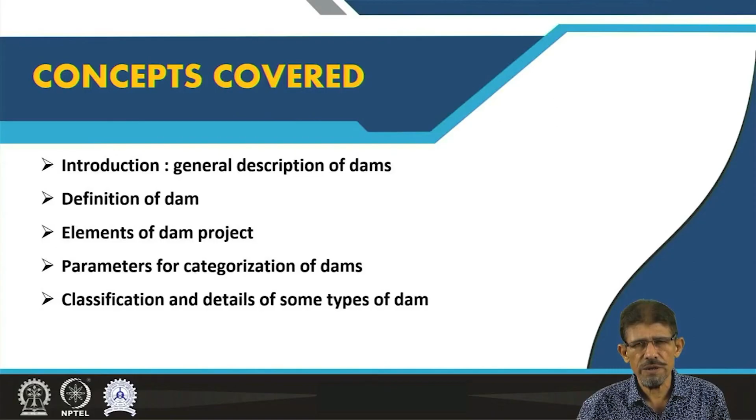Now we are competent enough to understand various aspects of engineering structures in the realm of engineering geology. Therefore, in these lectures, we will initially discuss some preliminary aspects and detailed aspects. Today, we are going to discuss dams and their types. In these lectures, we are going to elaborate on the concept and classification of dams. For this, we are going to cover the general description of dams, definition of dam, elements of dam project, parameters for categorization of dams, and classification, details of some types of dams.

Friends, as you know, dams are the barrier to check the flow of material. The dam projects are important for any country due to their significant contribution to the economy, prosperity and progress of any nation. Harnessing water resources of the country is the main aim of constructing a dam. Therefore, dam projects became popular throughout the world for various purposes like irrigation, water supply, fisheries, etc. Therefore, dam projects are very important for any country throughout the world.

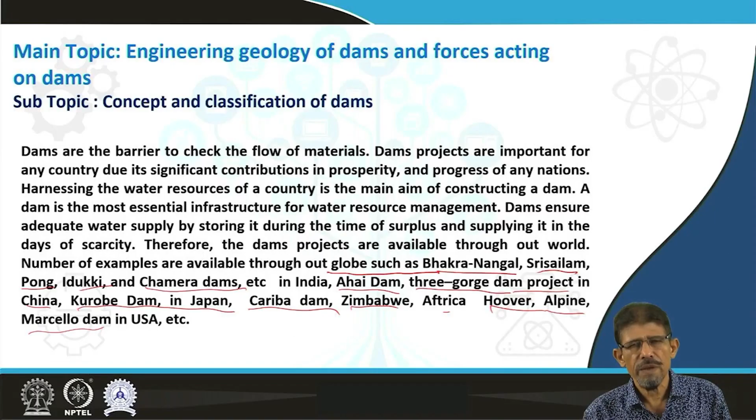A number of countries, or almost every country, has developed some dam project for generation of electricity or providing water to the communities, etc. For example, we have a number of examples throughout the globe, such as Bhakra Nangal Dam, Srisailam, Pong, Idukki and Chamera Dam in India, famous dams, Three Gorges Dam project in China, Kurobe Dam in Japan, Carib Dam in Zimbabwe, Africa, Hoover Dam in USA, some of the famous dam projects. Besides these, a number of dam projects are available in every country of the world. India is also rich in dam projects.

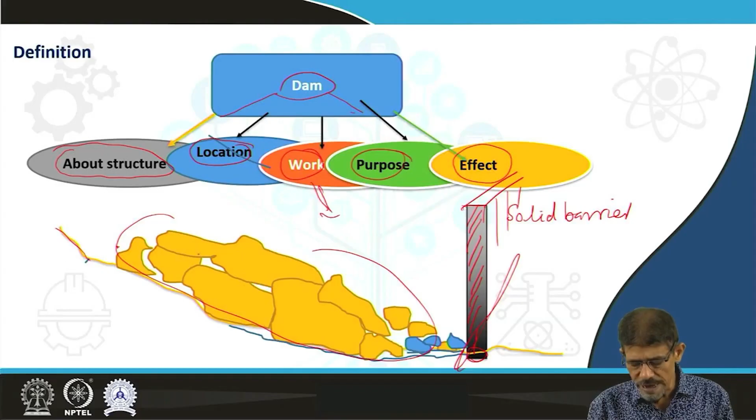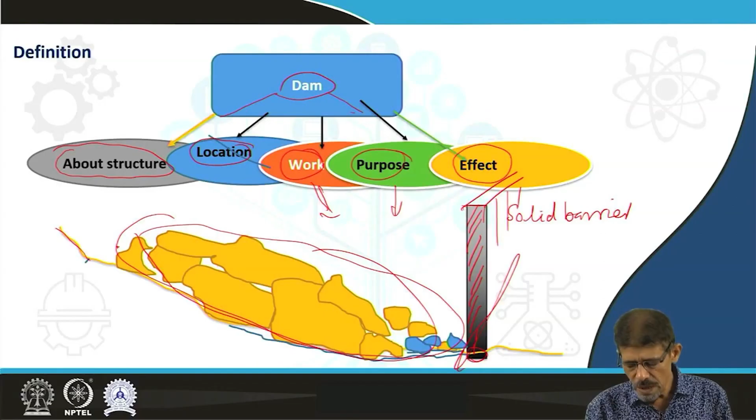If we are going to see a dam in general, we can explain the dam in view of nature or feature of structure, then location, then work, then purpose and then effect. In generalized form, this is a solid barrier. This cartoon portion represents the structure, a solid barrier. Solid barrier located at a particular location across this material; in 3D you can extend it in this way, across this material. What is the work? To check the flow of material. And what is the purpose? For impoundment of such materials. What is the effect? To change the physical, geomorphological, geological, hydrological and topographical features of the area.

Here why are we utilizing this material? As per generalized definition, we can say that a dam is a solid barrier constructed or developed or located across a flowing material to check the flow of material for impoundment of material or for storage of material. Due to this, there is a change in geological, geomorphological, hydrological and topographical features of the area.

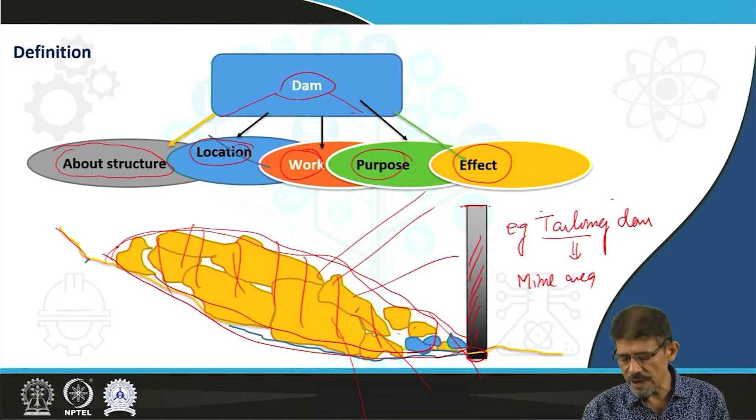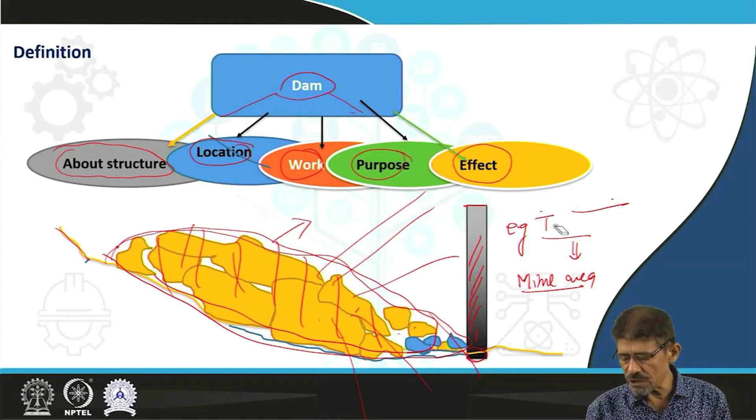For example, tailing dam from a mine area or industrial area: we are going to put waste material released from mines and try to store the waste material, avoiding unscientific distribution of material that would damage a large area. Then also we construct this type of barrier. This type of barrier is also known as a dam. The dam impounds or stores this and does not allow further distribution of the material liberated from these mines or industry or any domestic waste, etc. So in general, the dam is a solid barrier constructed across, to store material by checking the flow of material. So in a very simple way, you can explain the definition of dam in a generalized, easy way.

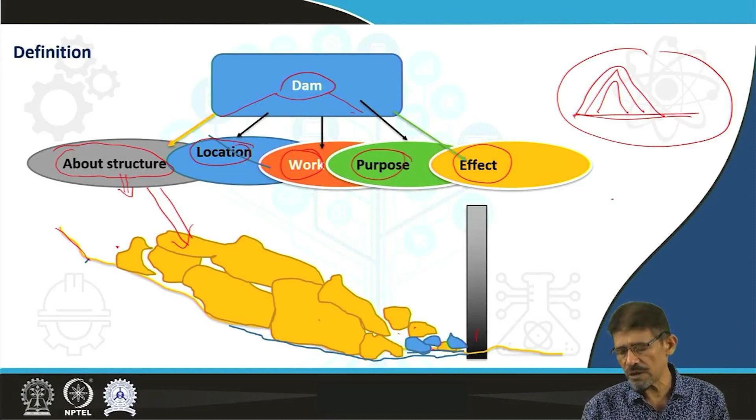First we are going to concentrate on this point about structure. So a dam is a solid barrier located across a flowing material or material under dynamic state. For what? To check the flow of material, and as a result, to store the material properly. And if a ground has stored material, then there is a change in geomorphological and geological aspects, because this stored material affects many components of earth, many processes involved in modification, some leaching, some distribution, and some development inside this stored material, etc. So there is a change in geomorphological, geological, hydrological and topographical features of the area.

The same concept we are going to utilize for water. If we treat this as water, then the same thing: a solid barrier constructed across flowing water to check the flow of water for impoundment of water, and a change in the hydrological regime of the area. If we look at this dam, then we can say that the dam may be made by a natural agency or may be man-made, anthropogenic.

Therefore, in the next step of generalization, we cannot say the dam is made by man, or the dam is created by man only. In nature also, in a number of places you can see the formation of dams, particularly in hilly regions, in the Sikkim area. The Sikkim area is prone to such temporary dam formation during the rainy season. Time to time, some blocks of rock block the flow of water temporarily, which may be dangerous for the low gradient, low lying area toward the downstream side.

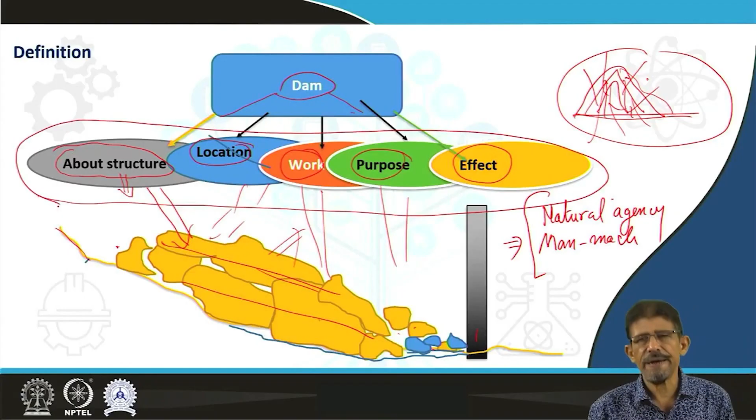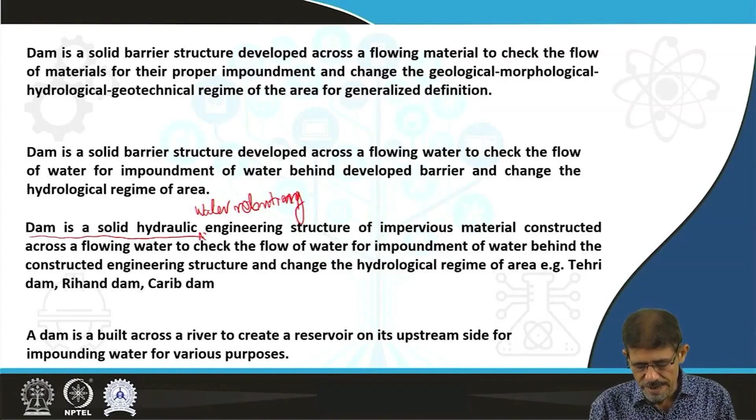So a dam, here we are going to define: a dam is a solid hydraulic water retaining, it is good to use retaining, engineering structure of impervious material constructed or developed across flowing water to check the flow of water for impoundment of water behind the constructed structure. And as a result, what happens? It changes the hydrological regime of the area. For example, Tehri Dam, Rihand Dam, Carib Dam and many dams throughout the world.

In the case of Tehri Dam, earlier the area of Tehri had some fort and some varieties of tall buildings, lots of vegetation and others, but after construction of the Tehri Dam, the major area was submerged underwater and new features came. It means there is a change in the hydrological regime of the area.

The water realm changes after construction of a dam because the dam creates a huge lake behind the structure. Suppose this is the dam, so this is a great lake or huge lake behind this structure as a result of impoundment of water. So now I will again try to explain this definition for easy understanding.

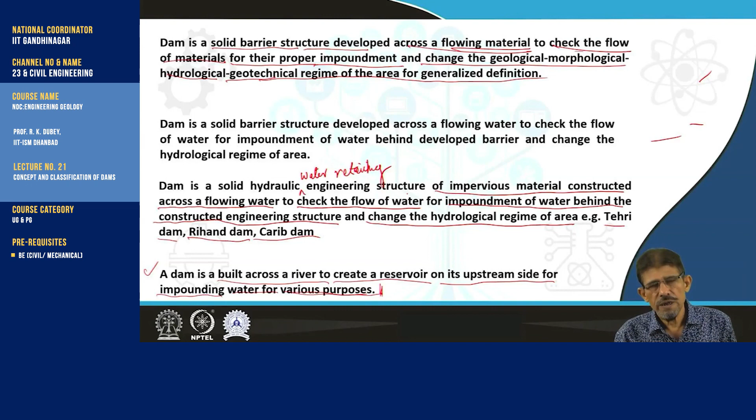Then if we consider the material as water, a dam is a solid barrier structure developed across flowing water to check the flow of water for impoundment of water behind the developed barrier and change the hydrological regime of the area with respect to the water realm or water catchment area. In engineering structures, it is a very excellent example.

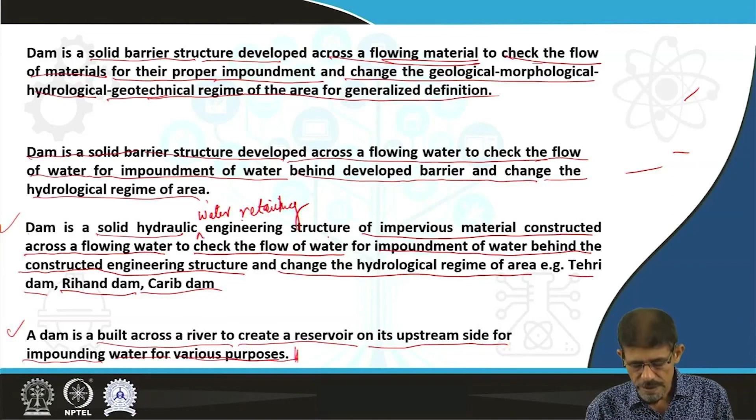A dam is a solid hydraulic water retaining engineering structure, particularly of impervious material, across flowing water to check the flow of water for impoundment of water behind the constructed structure and change the hydrological regime of the area. In very limited words, we can say that it is a barrier used to store water.

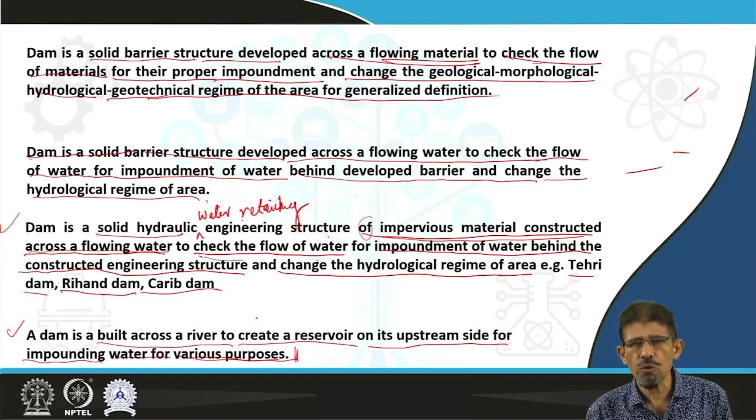Next, we are going to discuss the elements of a dam. Here I have developed this concept in view of this cartoon. You can see this is the section of a dam. A dam is actually like this, in 3D. Here we are going to check this section. This section is like this. This structure is solid in nature as per the definition, checking the flow of water from this zone, resulting in impoundment of water.

Here you can see earlier, here may be a river of limited width and extension, limited features. Now we are having here a huge lake. If we are going to see this whole structure, we can recognize it as a dam structure. The water stored behind in the form of a large lake we can recognize as a reservoir.

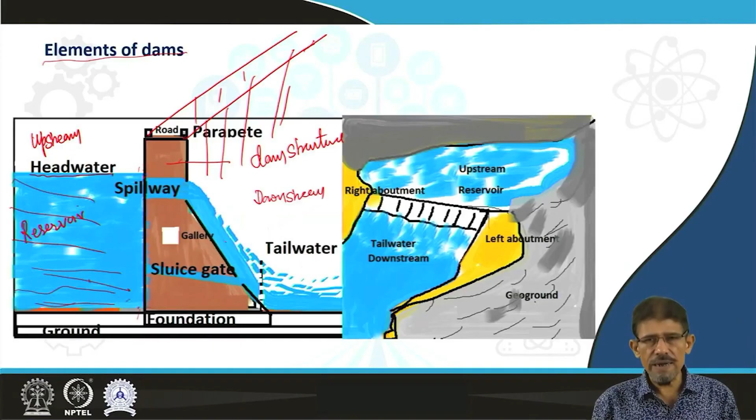The reservoir is located in the direction which we are going to recognize as upstream, and the water stored in the upstream area we are going to recognize as the headwater region. Opposite to this, the downside of this dam is known as downstream, and the water stored in this zone is recognized as tailwater. The tailwater accumulates due to release of water through the spillway or some openings. The water present in this zone is recognized as tailwater.

The top portion of this structure is known as the crest, and the bottom portion of this structure is known as the foundation or base. These two horn type solid structures, these walls, are recognized as parapet. This parapet is going to facilitate safety for the movement of vehicles on the top of the crest, and for pedestrian movement of people and others, and it also improves the ornamental look of the dam.

The distance from the surface of the water up to the crest is known as freeboard. The part of the dam at the bottom side which makes contact with the headwater is recognized as heel, and opposite to this, the contact on the downstream side with respect to the foundation strata is recognized as toe. The opening for release of water from the reservoir side is recognized as spillway.

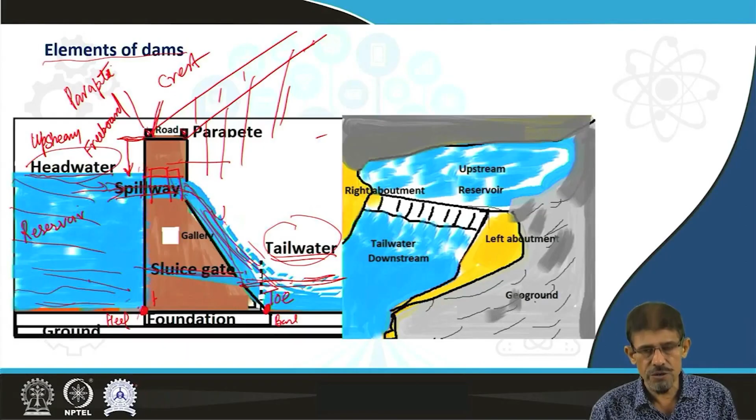Here we have some gates, recognized as spillway, and the spillway allows the water from the upstream side to the downstream side, or from the headwater region to the tailwater region. So here the water present in tailwater is due to release through the spillway, or we have another type, a narrow opening close to the bottom of this dam, recognized as sluice gate. The sluice gate also provides some water to the tailwater region from time to time.

Beside this we have one long narrow opening here. This long narrow opening is recognized as gallery, and this gallery is utilized for multiple purposes: for movement of officers and technical persons, for grouting, for installation of instruments, for checking the normal function of the dam, etc. In addition, this gallery is also important to reduce the upthrust, or upward acting force due to seepage of water near the foundation, which we will discuss in future; this is one of the principal uses of the gallery.

Below this foundation we have ground, maybe soft ground, hard ground, crystalline ground, bedded ground, foliated ground and others. Beside this, if we see the lateral extension, here I have shown you this earlier. So now you can concentrate on this aspect. This is the dam structure. This is the upstream side, and this water body is due to release of water from the spillway.

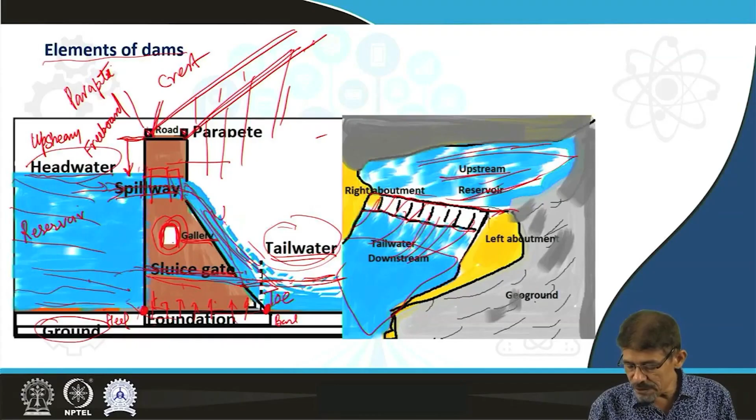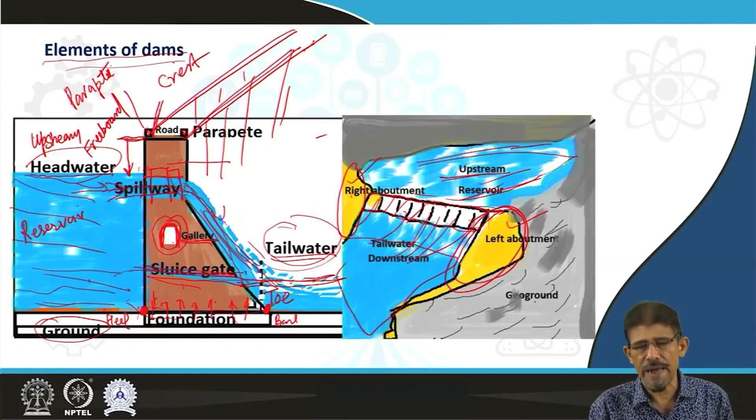The left side of this dam is recognized as left abutment, and the right side of this dam is recognized as right abutment. The left and right abutments protect the dam structure from different stability points of view. In this way, we analyze the major elements of a dam. For theory, you can see them one by one.

The reservoir: formation of an artificial lake on the upstream side of the dam due to blocking of the flow of river water is called a reservoir. Second, abutment, located as left abutment and right abutment. The parts of the two sides of the valley of a dam are called abutments. Abutments provide protection against the slide of soil or of weathered or weak material or rock. Crest is the top part of the dam.

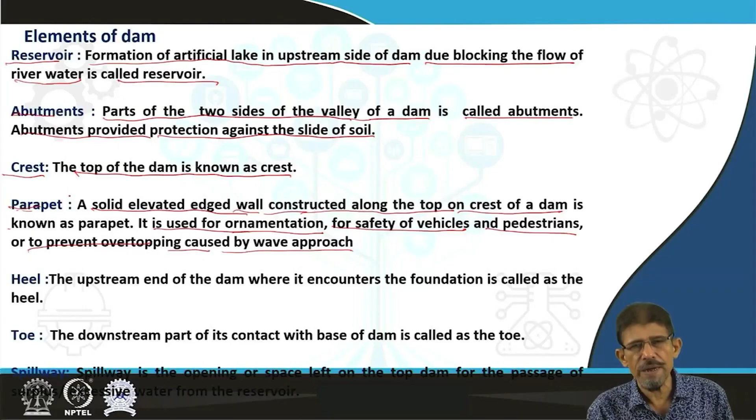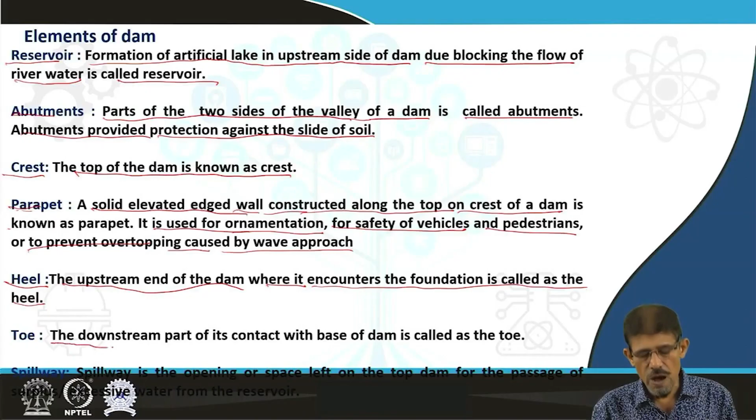Parapet is a solid elevated edge wall constructed along the top and crest of the dam. It is used for ornamentation, for safety of vehicles and pedestrians, and to prevent overtopping caused by wave approach. So the parapet is also a very important element of a dam. In addition, heel: the upstream end of the dam where it encounters the foundation is called the heel. Opposite to this, the downstream part of contact with the base is called the toe.

Next terminology, headwater: the high reach of the water flow at the upstream side, particularly in a reservoir, is recognized as headwater. Opposite to this, the accumulation of water toward the downstream after the dam is recognized as tailwater. Freeboard is the distance between the maximum level of water present in the upstream side or headwater region and the crest.

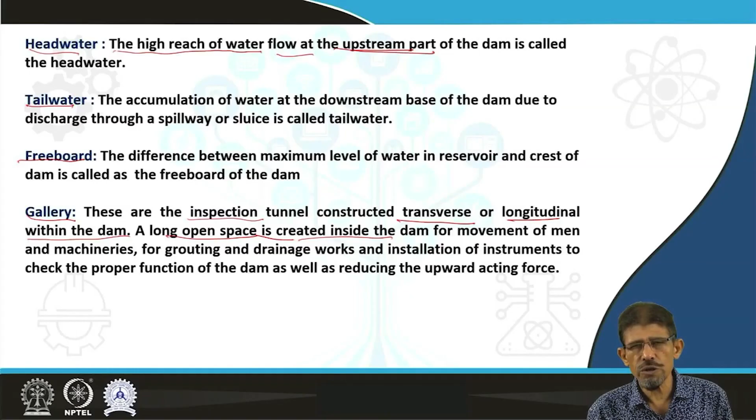The gallery: these are the inspection galleries, transverse or longitudinal within the dam. This long open space is created inside the dam for proper inspection, for grouting, for repair, for maintenance, and for reducing the upward acting force. So these we have already discussed. The elements of a dam describe different parts of the dam project.

Now it is important to classify different types of dams. As per definition, it is utilized for multi-purpose or for mono-purpose. Various purposes we have already briefly explained. If we are going to categorize dams, then it is easy to utilize certain parameters for classification, like intended purpose, material used, design and function, then application. In view of these parameters, we are going to categorize different types of dam.

First, we are going to elaborate about intended purpose. Intended purpose is mainly based on objective: for what objective was the dam project constructed, or will the project be constructed in future? Irrigation dam, hydropower dam, water supply dam, flood control dam, navigation dam, fishery and recreation dam, wildlife water supply dam, etc.

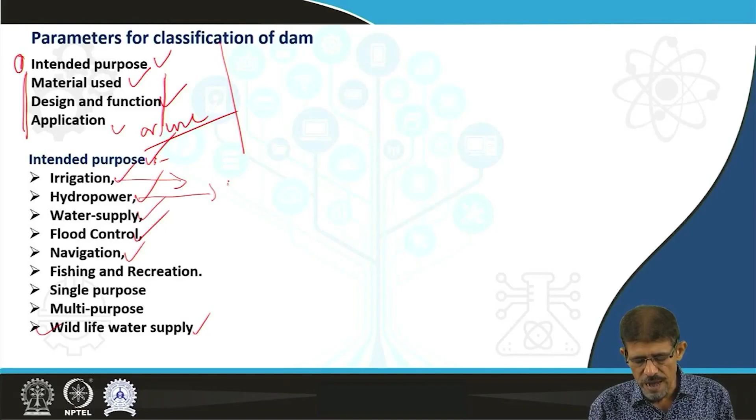The name is self-explanatory. If the dam project is utilized for irrigation purpose, agricultural field, then it is known as an irrigation dam. If it is used for generation of hydroelectricity, then it is recognized as a hydropower dam. If this dam project is devoted to water supply to communities or industry, it is a water supply dam. If the water supply is available to wildlife, then we can say wildlife water supply dam. If it is utilized for flood control, then flood control dam.

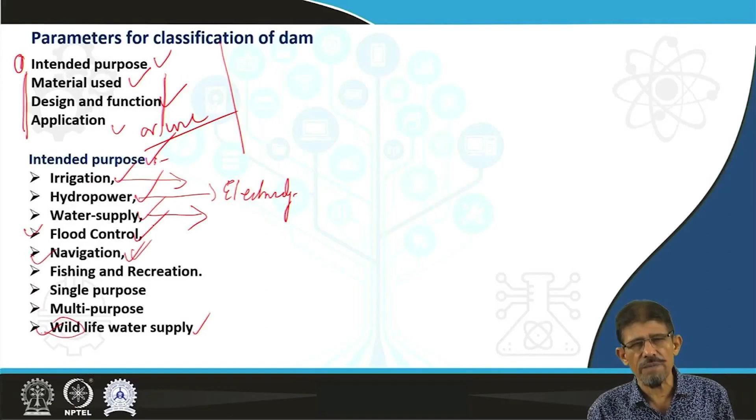If the reservoir is utilized for navigation, it is a navigation dam. For fishery culture and recreational activity, it is called a fishery and recreational dam. Then wildlife water supply dam. The dam may be single purpose or multiple purpose. Maybe only for irrigation, or it may support irrigation, generation of hydropower, and flood control also; then it has more than one objective and is recognized as multi-purpose.

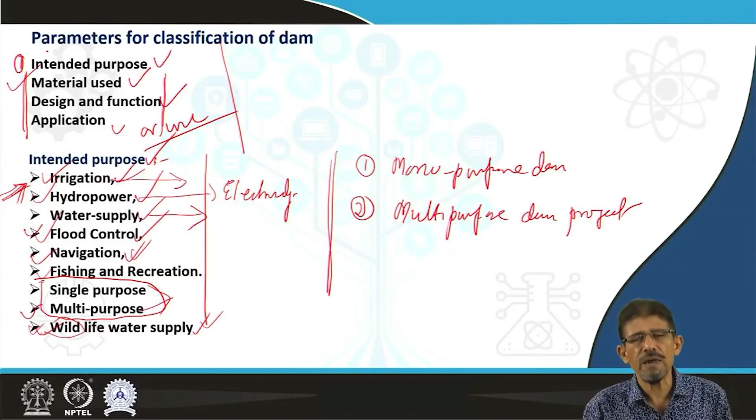So either it is going to feed a single objective, a mono-purpose dam project, or if we are going to satisfy a number of purposes, a number of objectives, then a multi-purpose dam project. Further, we are going to classify our dam based on another parameter, material used for construction of the dam.

Material used: as we know, dams are constructed using varieties of materials such as concrete, steel, masonry, timber, plastic, etc. By the major type of material used: timber, then timber dam; masonry, then masonry dam; concrete, then concrete dam; soil, then earth dam; rock and some binder, then rock fill dam. In addition to this, we have steel dams and plastic dams, limited in number and life, but in the world we have these types of dam also. So these are all the divisions based on material used for construction of the dam.

Now we are going to elaborate one by one, but limited types of dams. First we are going to elaborate the timber dam. The timber dam is a very nice type of dam, made up of wooden logs and planks. The dam made up of wooden logs or planks is known as a timber dam. This kind of dam is used to check the flow of water and the formation of a localized pool, meaning accumulation of a water body.

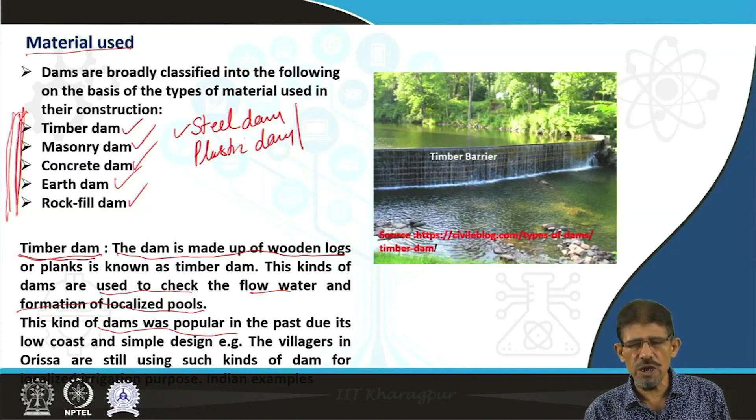This kind of dam was popular in our past, but now, due to investigation of more suitable and strong materials, people have stopped constructing timber dams. Still, we are practicing timber dams in some countries. In some parts of the country, particularly villages in Orissa and some other states, such dams are still used for localized irrigation purposes. Here you can see a view of this.

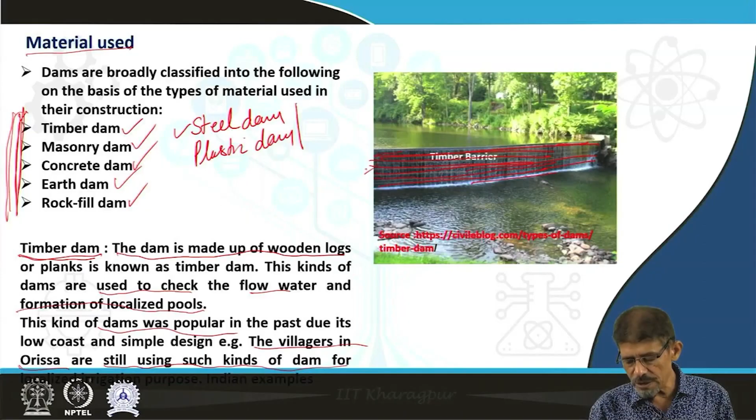Here a number of planks and logs of timber are arranged in a systematic way along with some earth materials and others, some soil, some bitumen and others, to create a solid barrier which is able to check the flow of water as per definition and store the water behind this structure.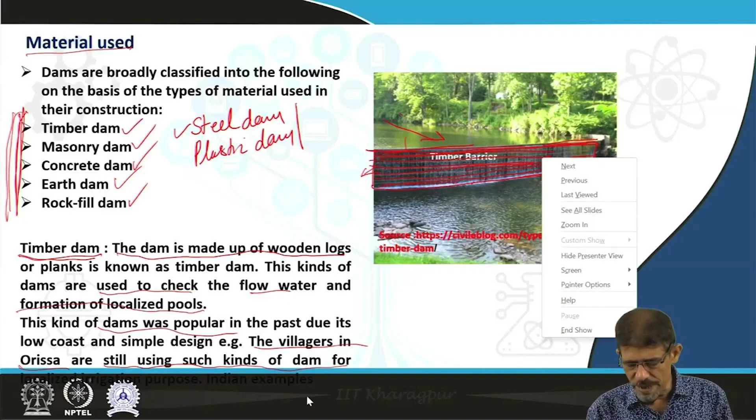Another aspect I try to explain here is in which condition this type of dam is suitable to construct. This type of dam is suitable to construct in any location. Then what is the benefit? The major benefit is that it is cheap in nature and simple in design. Even an unskilled person can create this type of dam for a localized purpose.

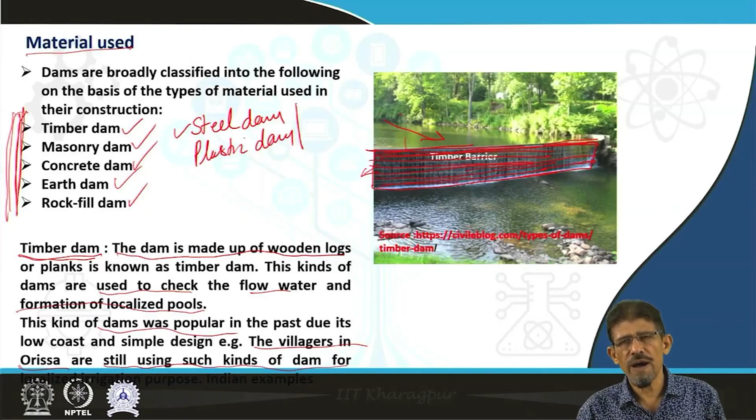And what is the drawback? The drawback concerns the life of the dam, due to deterioration caused by the interaction of water and other biogenic components, biogenic features responsible for the reduced life of such a dam.

Another type of dam, a very nice type of dam, is the masonry dam, and masonry we have already discussed. The stone or dressed stone utilized for construction purposes is recognized as masonry. So this whole structure is made up of masonry dressed blocks. The dam is made up of masonry, dressed and undressed. We are also utilizing undressed blocks of rock, including nearby river boulders, cemented together by concrete or a suitable binder.

The non-porous rocks selected for construction of a masonry dam are found more suitable to make the structure watertight. The dam is constructed using masonry and concrete to provide a watertight body, constructed with the help of boulders recovered from the particular river valley where we are going to construct this type of dam.

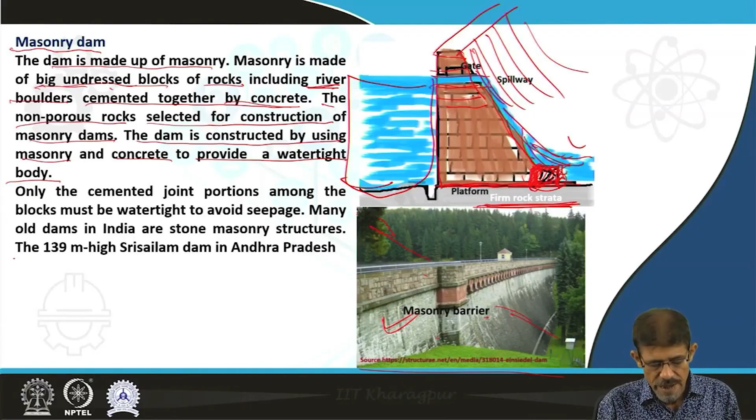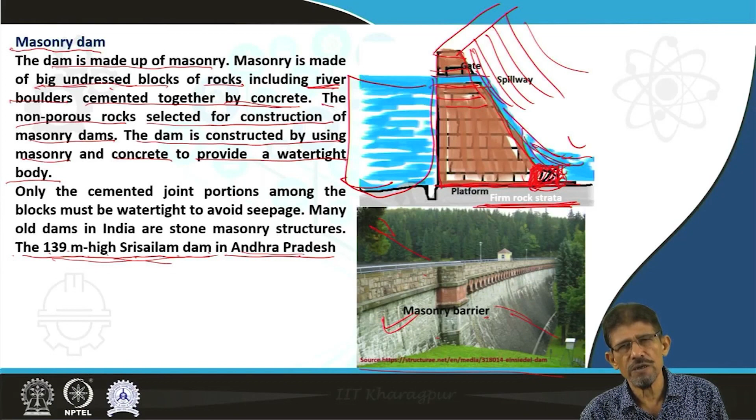We have a good example in India. You can see one figure here I have taken from this source. This is a masonry barrier, this is the downstream, and this is the upstream. A good example is the 139 meter high Srisailam Dam in AP, a good example of a masonry dam. Other dams also, Nagarjuna Sagar Dam and others. But this 139 meter high Srisailam Dam in AP, India, is a good example. Friends, the rest of the types of dam we will discuss in our next class.

This material I have modified from the concept given by Gangopadhyay S. in his Engineering Geology, published by Oxford University Press. Then the Engineering Geology book written by Bell F.G. in 2007, then Kesavulu's Textbook of Engineering Geology as partial support, and then Waltham 2018, Foundations of Engineering Geology, utilized as partial support.

In conclusion, we can say that a dam is a hydraulic water retention structure constructed across a river to store water for mono or multi-purpose use. Dams are classified on the basis of intended purpose, material used, design and function, and applications. The timber dam is the cheapest dam, simple in nature, simple in design and use, utilized for some localized purpose.

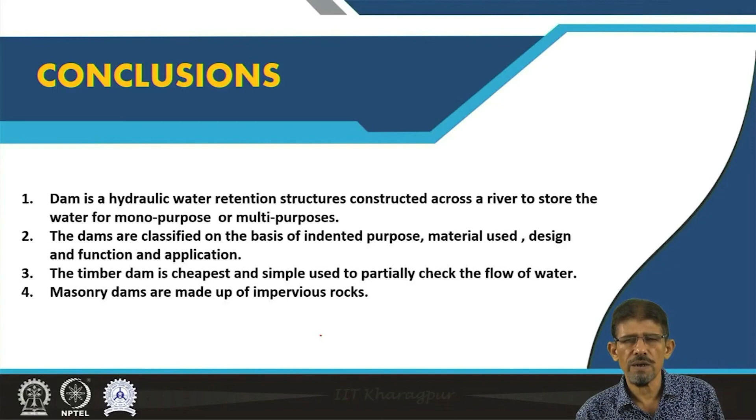Dear friends, in this class we have discussed the definition of dam, elements of dam and parameters used for classification of dams. In addition, we have elaborated some types of dam, the timber dam and masonry dam, in detail, touching various aspects of them. The rest of the kinds of dams we will discuss in our next class.